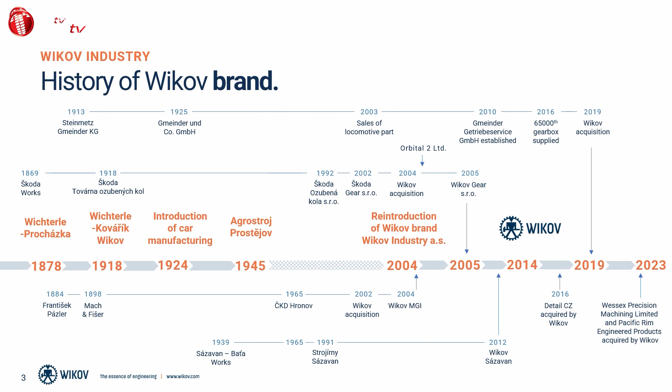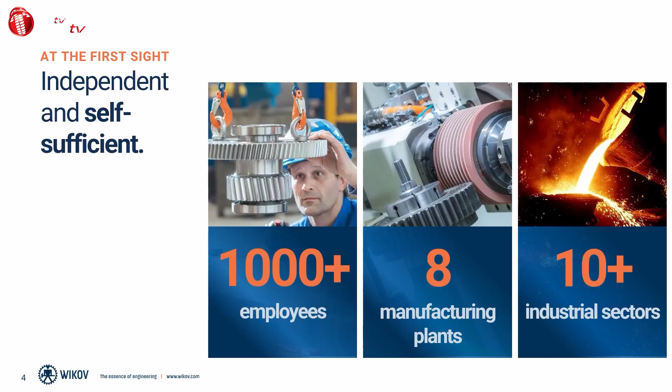As you can see, there are a lot of new companies coming, new acquisitions. So we made two recent acquisitions this year in Canada because we want to grow also on the North America market. We got more than 1,000 employees now. As I said, we are a group of companies. We got 8 manufacturing plants, and we are supplying to all kind of industrial sectors, also here in Greece. The annual turnover is constantly growing. Currently we are around $140 million.

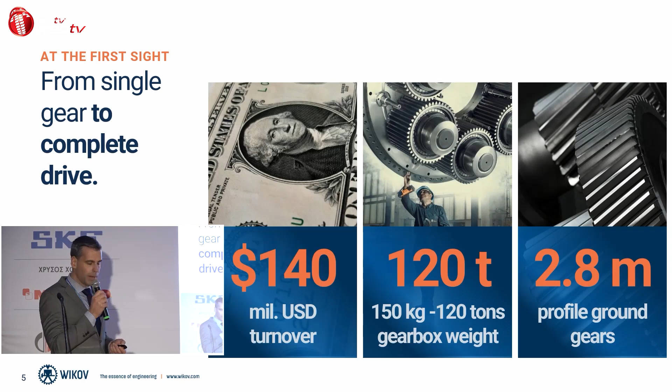We can supply gearboxes from fairly small ones for streetcars, trams, which would be around 150 kilograms, up to big beasts, 120 tons, that would be for cement plants and mineral processing. We can make gears fairly large, up to 2.8 meters.

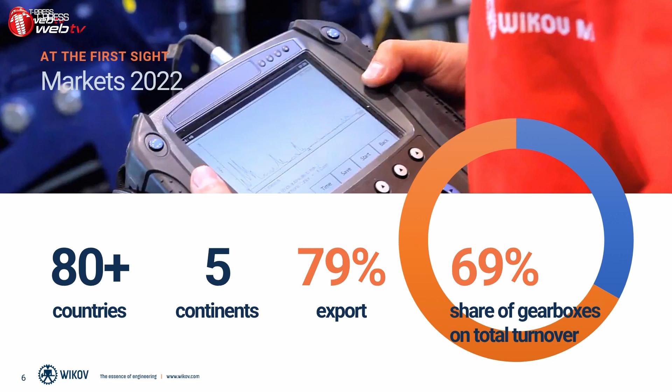We supply to all kind of countries. Basically, we are focusing on export. We supply very little to the Czech Republic, and the stuff we supply in the Czech Republic is very often then re-exported as a part of large equipment. So we don't really focus on the domestic market. We focus on the global market, all kind of continents.

And last but not least, in Greece, we are present through Andreas Pamphiliou's company, DTA, where we cooperate mainly in steel and cement business, but obviously we want to grow further into other areas. We are not only a manufacturer, we focus on the complete product. So we are developing the product, we are making the product, we are delivering the product, and then we are servicing the product. That's basically our core business.

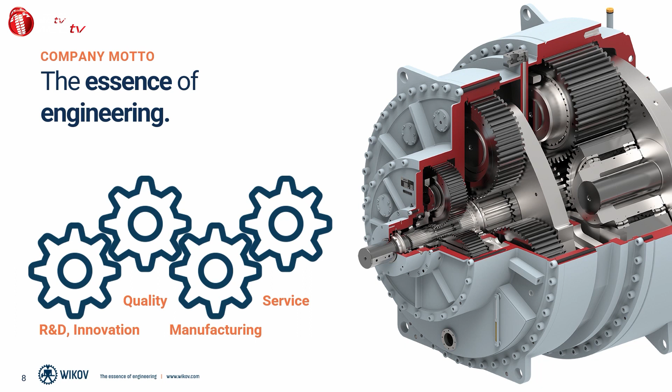We always do a lot of R&D. We have all kind of interesting technologies which we can supply into drivetrains. One is the flexible pin, I will talk more about it in detail. We can also supply the variable speed gearbox, which is quite interesting for some areas, and we can also supply for preventive maintenance the online monitoring system, which we call WiGuard.

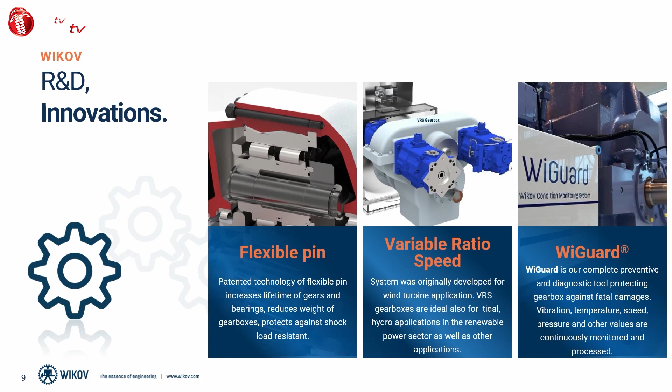I will talk about that a bit later as well. We are supplying to all kinds of demanding industries where you need to go through various certifications, not only for the company but also for the product. So we've got state-of-the-art quality management in the factories. Every time you supply a gearbox, for example, to marine business, vessels, oil and gas, whatever, it's very demanding. There are a lot of safety measures you have to apply for the design, manufacturing and delivery.

So basically, we are certified by all kinds of different bodies, and we can also assure that the product is certified as well. Every gearbox, before we deliver, is tested, either load tested or no-load tested. For prototyping, we often do full load testing. We can test up to 8 megawatts, so you can imagine it's a very large test rig. So we've got several test rooms, and we can provide very extensive testing for both high torque as well as high speed.

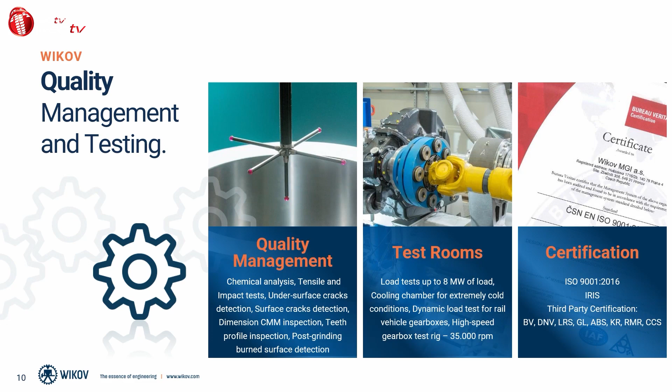We manufacture all the key components in-house. So basically gearing we produce in-house. We can do ground gears up to 3 meters or 2.8 meters. We can hob the gears even larger. We do heat treatment in-house, which is a very key process for good quality. Obviously, we do shafts and housings, rotating pieces in-house. We don't cast, we don't weld. So there's a lot of stuff we also cooperate on, but basically the key operations for the delivery we keep in-house.

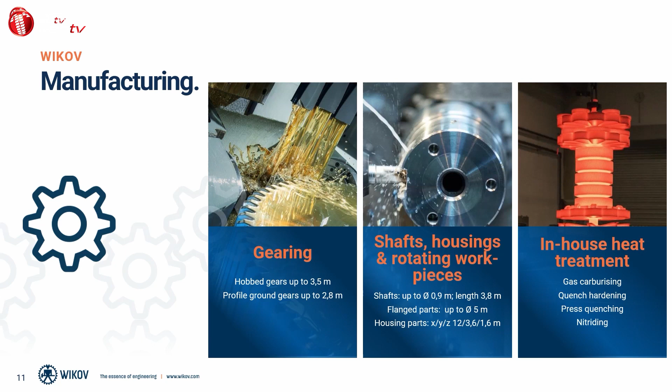We obviously provide for the customers also the installation, commissioning and service, which is key to be sure that the equipment we supply will be running fine and smooth. We offer on-site inspections. As said, we can offer online monitoring systems, and we also offer overhauls and service either at the client or with the gearbox back in our premises.

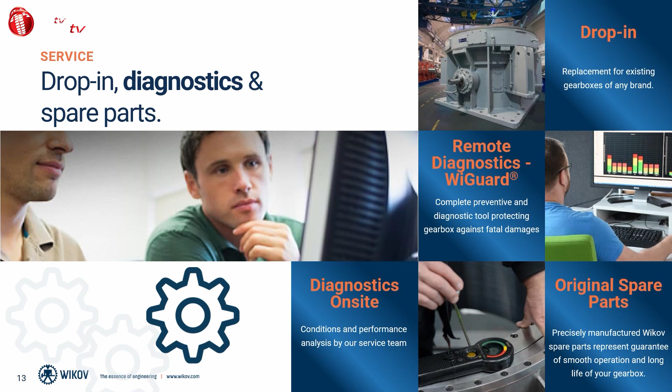We can also offer drop-in gearboxes, which is basically when the client has got an old gearbox, we can deliver a gearbox which fits to the same place, to the same interfaces, so there is no need for the client to change anything. Very often we can do some upgrades to that, so the gearbox can transmit more torque, more power, or can be more efficient. We can also supply spare parts, both for our gearboxes and also for gearboxes of other brands. We can do reverse engineering, and we've got a good team on that.

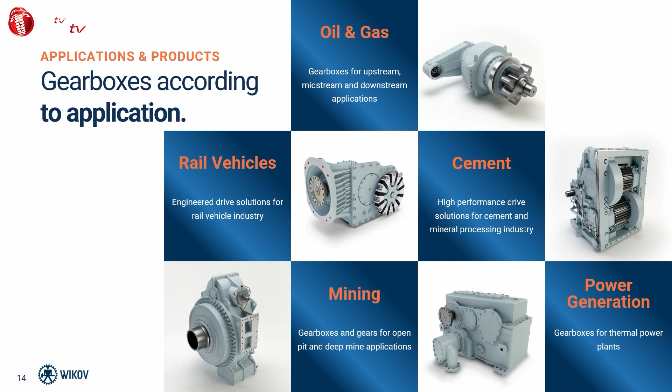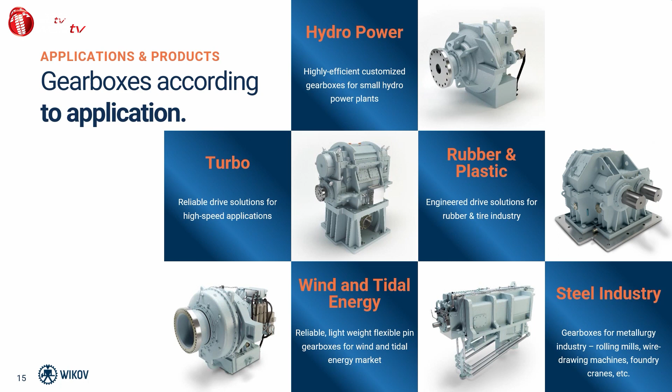So oil and gas, historically. Rail vehicles is very strong. We supply gearboxes to trams, locomotives, trains, EMUs, all kinds of things. Mining, also quite strong, but obviously with the current situation in Europe, mining is going down. Cement, still very strong, and mineral processing in general. Power generation, that's still interesting, both for thermal power plants as well as nuclear power plants. There are going to be some more nuclear power plants built in Europe now, so we are definitely in tenders for those. Hydropower, also interesting, I think, for Greece. We've got some hydropower plants here.

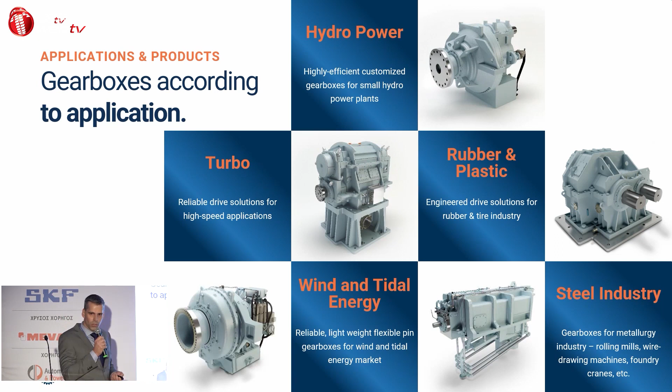Turbo in general, running all kinds of compressors, high-speed pumps. These gearboxes are interesting because they are large and they spin at very high speed. You can have up to 35,000 RPM on big shafts, so it's quite scary to see these machines running. Rubber and plastic, we are supplying to all kinds of traditional tire manufacturers for cars, companies like Michelin, Bridgestone, Goodyear, Continental, you name them. Wind and tidal, we used to supply a lot to the wind business, now we focus more on the overhaul business. And steel industry, that's also quite a traditional market, and we supply well also here in Greece. Marine shipbuilding, we do a bit.

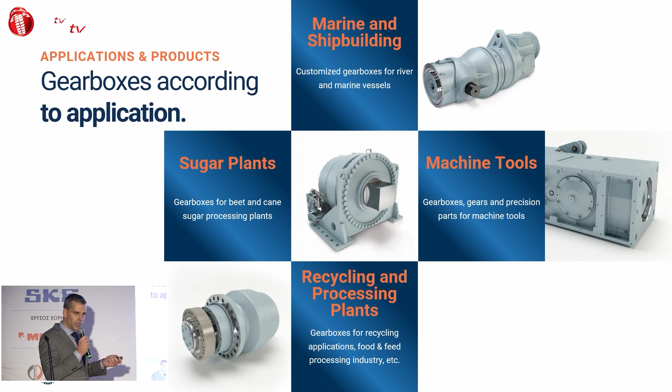Sugar plants, that's mainly in Latin America. And obviously machine tools and recycling processing. Recycling processing is definitely a business which is growing, because recycling and reuse of material is definitely an area which is very interesting for Europe.

We provide a lot of custom gearboxes, but we also have a range of catalog products. Catalog products means that they are not off the shelf. We don't have them on stock. We always build according to the order, and we can do a lot of modifications for the customer according to his needs. But the benefit is it's pre-designed. We can use the modules from that, and we can save a lot of cost for the customer, and also we can reduce the risk, because the gearbox is not new.

So we get a range of Orbiflex planetary gearboxes, which goes from very small up to very large, up to 60 ton. We've got a range of WinGear, which is traditional helical and bevel helical gearboxes, and also a range of high-speed gearboxes.

And obviously we've got a lot of cases where we took the basic gearbox, the catalog gearbox, and modified it according to the client needs, so it would fit better to their portfolio or to their machine.

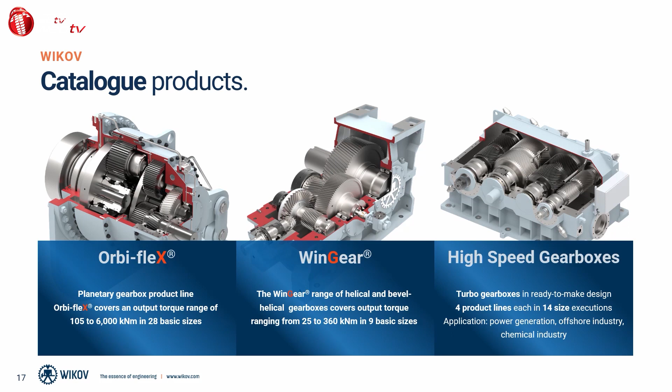We also have a nice configurator. I would say it's one of the best configurators you can find on the internet for gearboxes. It's www.gearboxconfigurator.com. You can play with that. You can select either the planetary or bevel helical gearbox, see the size, and send us the inquiry, and we would come back to you with the proposal.

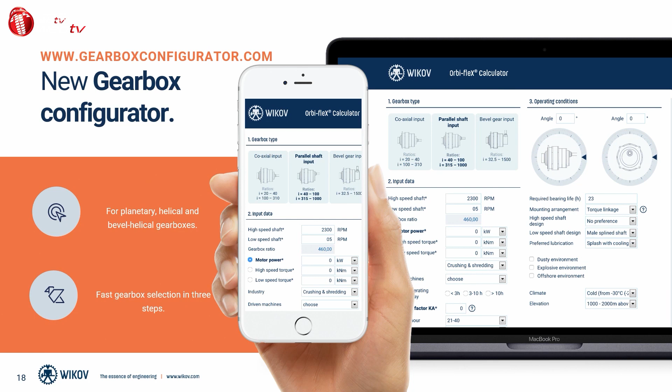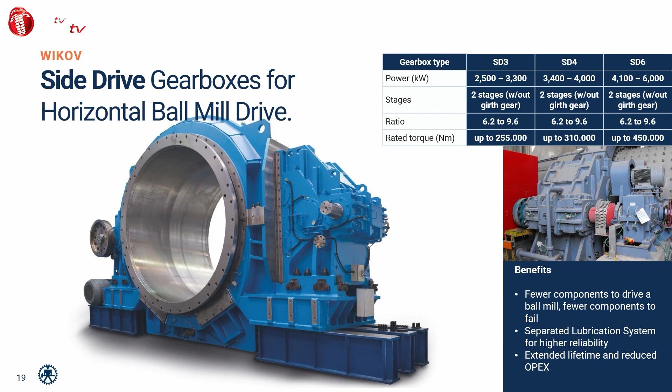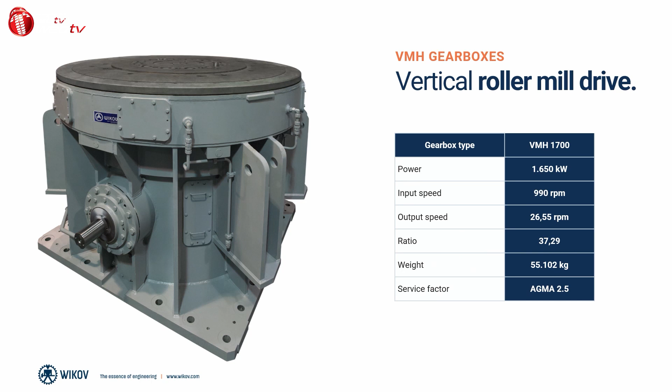We can also supply vertical roller mill drives, very popular in cement plants, mainly an older technology. So one of the technologies we've got for planetary gearboxes is called flexible pin. I will try to show you a video with sound which explains how it works in 2 minutes. It's definitely a technology which is helping us to transmit safely more torque, mainly for applications with a lot of shocks, typically mineral processing, mixing, crushing, or whatever.

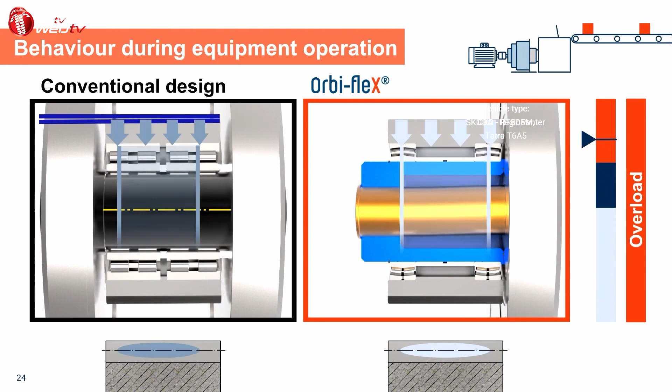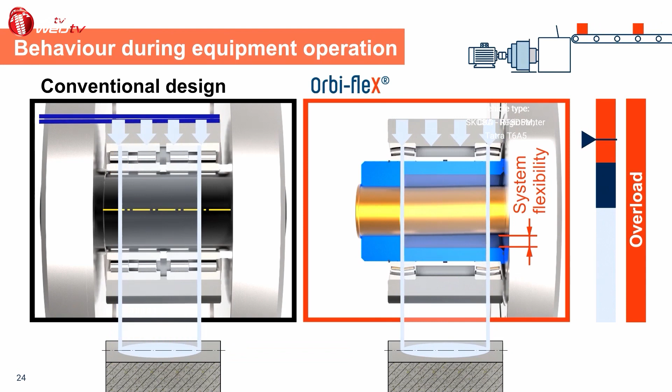And now you can see the harder material would come to the mixer or crusher. The flexible pin can compensate the deformations, while the conventional design would start to have a deformation, would twist, and you would start to have a compromise on the teeth pattern and also on the bearing loading, which means you start to overload the bearings and gears, and there would be a typical failure on a planetary gearbox.

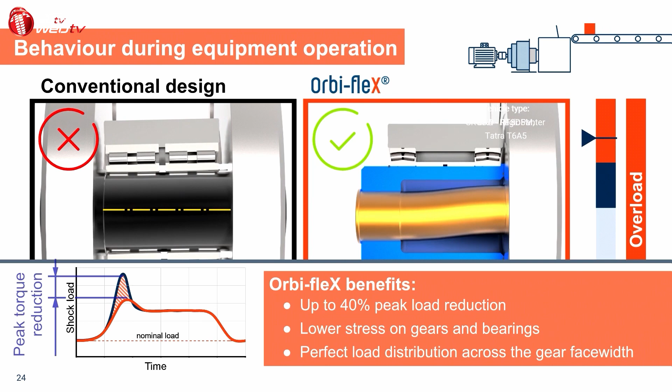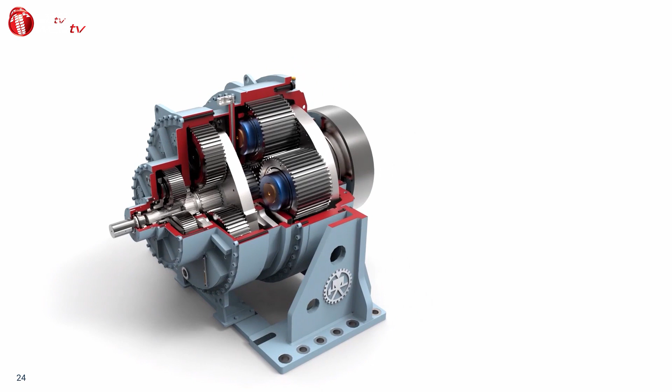We use the flex pin for cost reasons. We use it on the low speed, high torque side. There is no reason to use it anywhere else, and it provides a fairly cost-effective solution for the clients.

It's not new technology, it's technology coming from the 1960s actually. We got it through one of our companies, called Orbital2 Limited, which we acquired in Britain more than 20 years ago. So we've supplied hundreds and hundreds of gearboxes with this technology and never had a single failure on a planetary stage since then.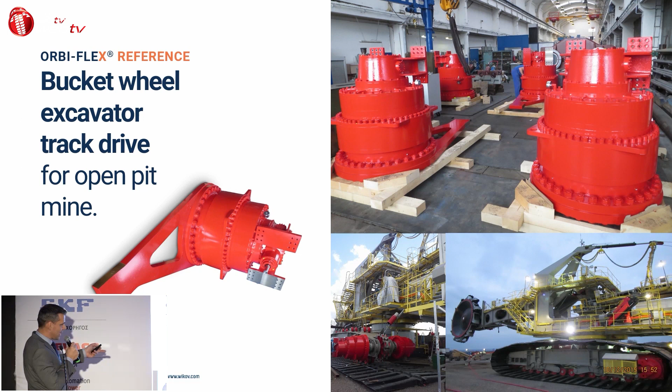So that's a fairly interesting technology, and it's helped us to make the gearboxes smaller and mainly more durable for all kinds of industries. A few examples of the Orbi-Flex, this planetary gearbox with flexible pin.

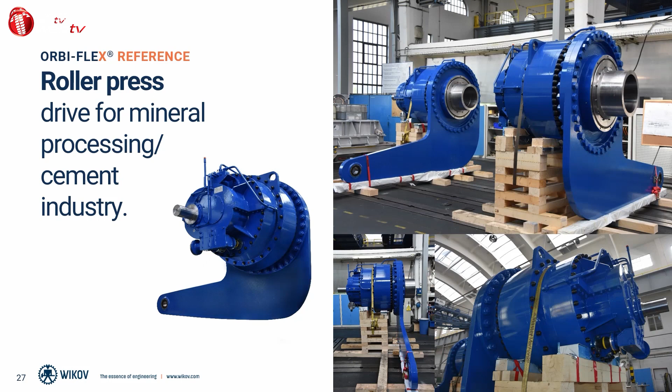Bucket wheel excavators - the coal mines are diminishing from Europe, but you've got a lot of them here as well, either for running the tracks or basically running the bucket wheel itself. Roll press applications, HPGRs, that's typically used in mineral processing and cement plants.

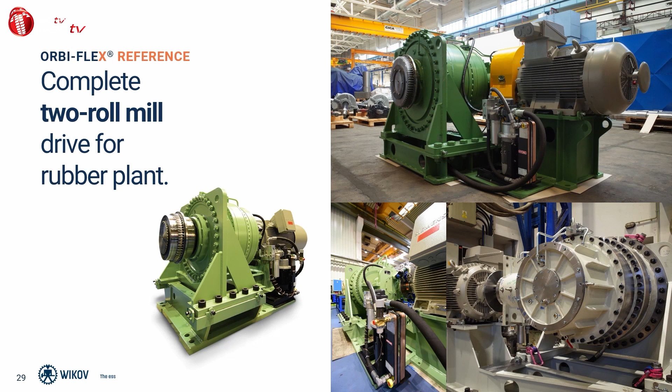Rubber plants, all kinds of variations - rubber plants are fairly conservative, but more and more of them are going for planetary gearboxes simply because they are smaller and more efficient. Hydropower plants - we also supply to all kinds of hydropower plants. If you would come to the US, to Niagara Falls, there are gearboxes running on the local hydropower plant.

And also mineral processing stirred mills. These are the modern way of milling in mineral processing. We are supplying to several OEMs now, and that's definitely a growing business. This is slowly replacing the old type ball mills - a new technology for very fine and efficient grinding.

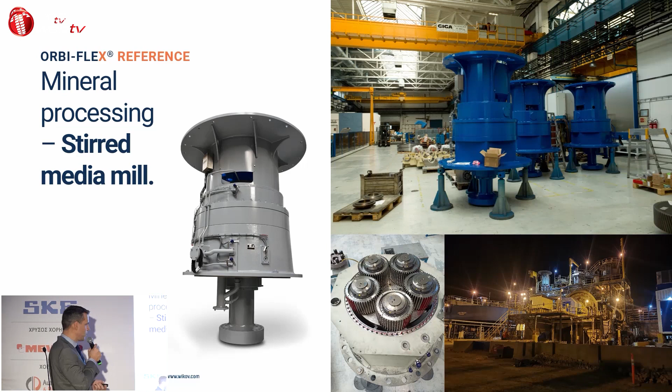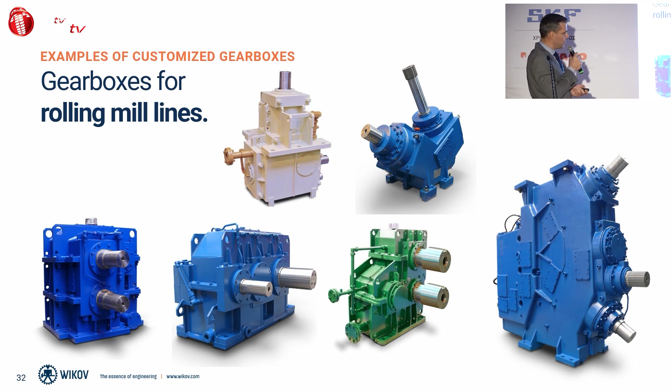We also supply customized gearboxes, typically for steel. The steel industry will be typical for all kinds of customized gearboxes. So you can see the gearboxes for rolling lines with all kinds of strange shapes and strange angles of the shafts. As said, we also supply to Greece now successfully.

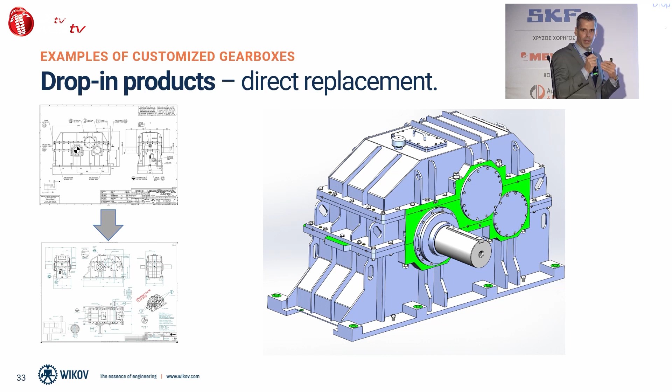When it comes to the customized gearboxes and drop-in products, we can either supply the traditional way - basically the old gearbox, and we supply a new gearbox which looks exactly the same and would fit. There can be upgrades: case-hardened gears if the gears were quenched before, so we can make the gears more durable, we can upgrade the bearings, we can make the gearbox able to transmit more torque, or when the client is up for that, we can suggest a different approach.

We can replace the drop-in gearbox with - or basically we don't do drop-in gearbox, but we rather do a new design. This is an example of the old-fashioned rubber mixing gearboxes, which weigh around 20 tons. We successfully did that for client Continental, and now we supply to Goodyear as well, where we supply combined parallel shaft planetary gearboxes, which are nearly half the weight and also more efficient.

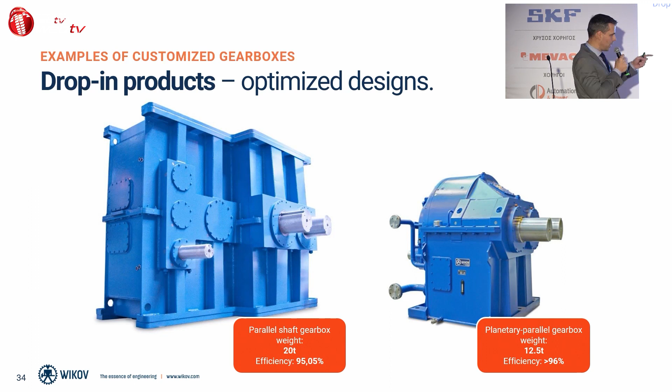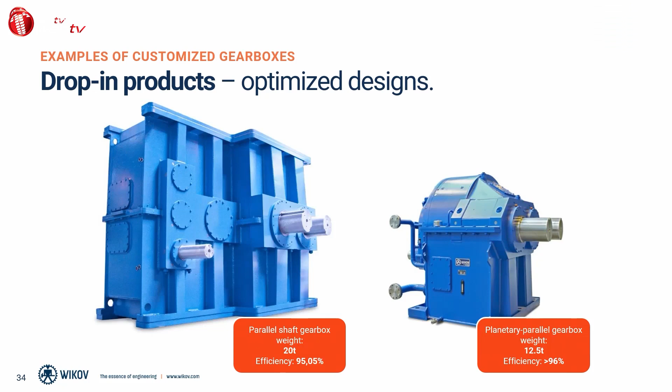That's quite interesting if you think about power consumption per year. It doesn't look like much - it's just 1% efficiency - but you can save thousands of euros, and more and more clients are now asking about efficiency in their production. Also, because the gearbox is lighter and a lot of cost comes from material, the gearbox is cheaper too. It's not half price because it's more complex, but it's definitely cheaper.

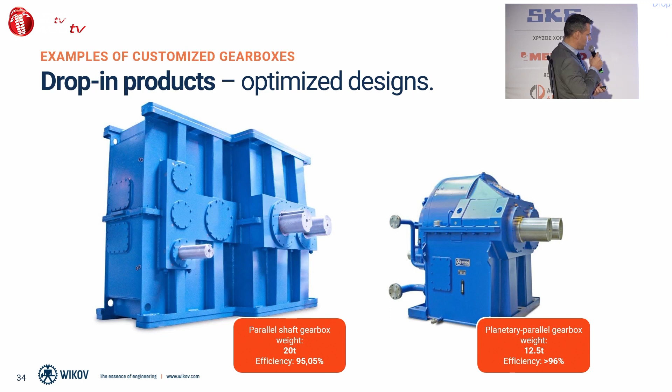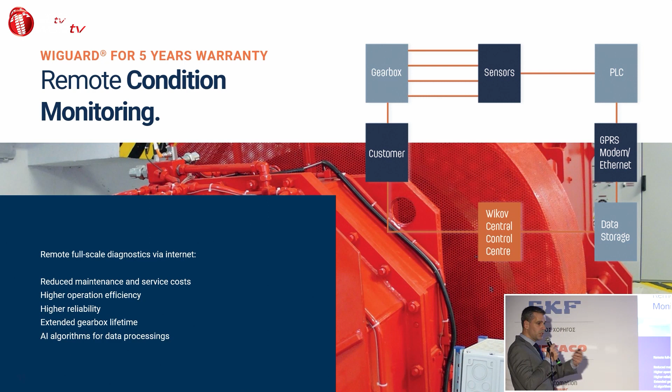As mentioned, we can also supply a condition monitoring system, which is very modern and very popular. We can fit the gearbox or a complete drivetrain, including the motor and driven equipment, with all kinds of sensors. We can measure vibrations, temperatures, speed, oil pressure, torque, and oil cleanliness, and get this data into our product called WIGUARD, where we basically process the data.

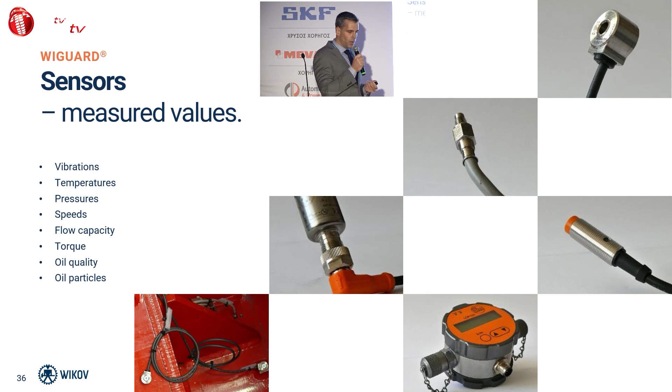We are using AI algorithms for that now, and the client can visualize the data on their screen. They get regular reports based on the agreement we do with them, so they can see if the equipment is in good condition or not.

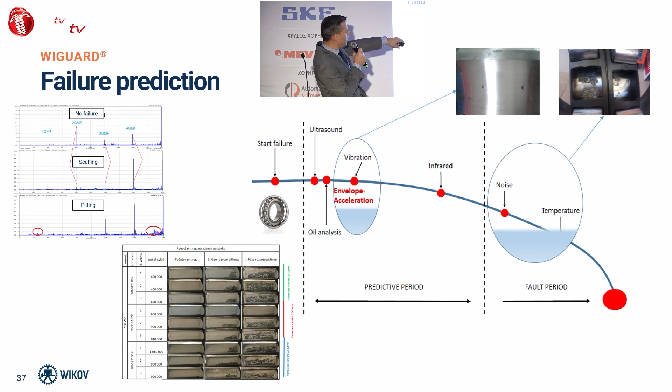This is a well-known graph taken from the internet for vibration or bearing life prediction. Basically, once you start to measure some vibrations on the bearings, you still have some predictive period before the life goes down. What we offer is we go slightly further.

From the vibrations on the bearings, we can also read the vibrations of the gearing. Through extensive testing, where we deliberately damaged gears and measured vibrations, we learned to read from the vibrations what's going on with the gearing, so we can also predict the life of the gears - whether there's scuffing, micro-pitting, or whatever.

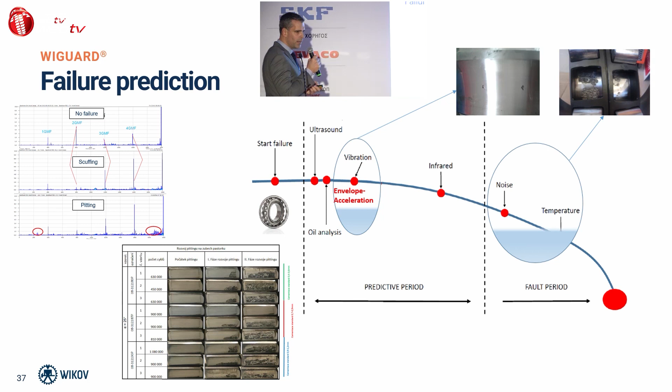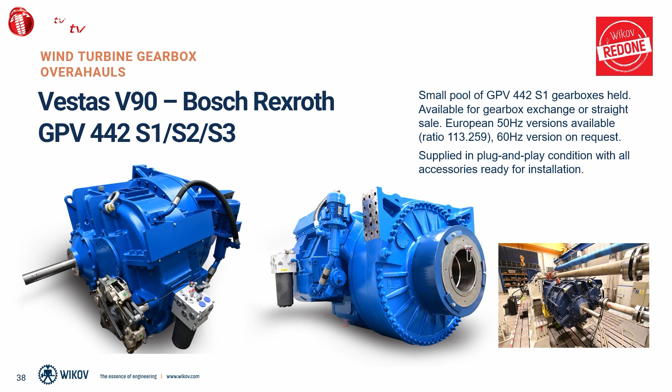When we talk about the aftermarket, we also promote wind turbine gearbox overhaul services, where we are building a small pool of gearboxes. This is an example of the gearbox - it's a non-WIKOV gearbox, a Bosch Rexroth gearbox for the Vestas V90.

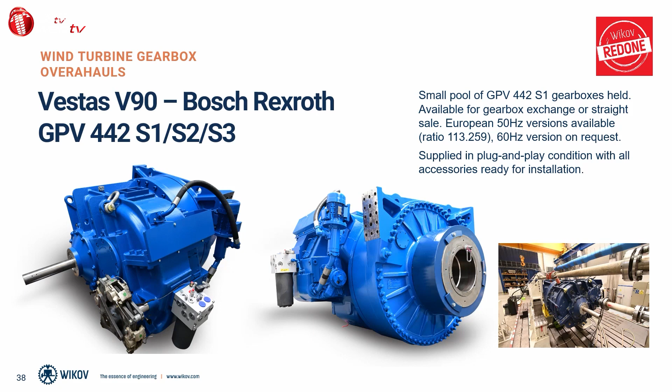We keep a small stock of these gearboxes and offer them for exchange. So if the client's got a broken gearbox, once they bring the crane to the tower, we can bring a fully dressed gearbox, plug and play, and they can replace it in one day. We take the broken gearbox back and fix it. That's just an example of how it works.

We are fixing all kinds of gearboxes, not only Bosch but also Winergy and others, and we can upgrade those gearboxes from S1 to S2, etc. That's the way the wind business works - slightly different operationally than normal business when it comes to overhauls. But it's definitely a growing business for us, and it's also interesting for Greece.